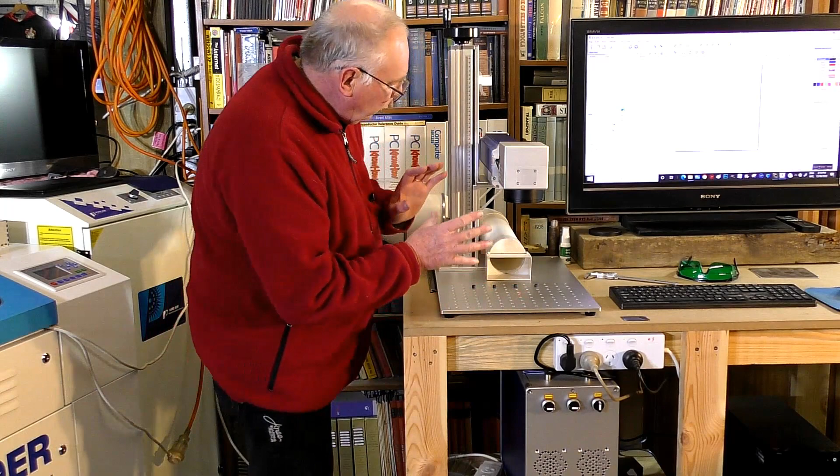So this is a fiber laser. The actual laser itself is housed in this box that's slightly bigger than a computer cabinet, and this is the galvo head and adjustment mechanism. Inside here there's two mirrors that move extremely quickly, and this is a lens that directs the beam down onto the work. Now this particular laser is a 30 watt fiber laser, but don't let that fool you.

That 30 watts is magnified up to about 24 kilowatts. That's how it can, if you want, cut through stainless steel.

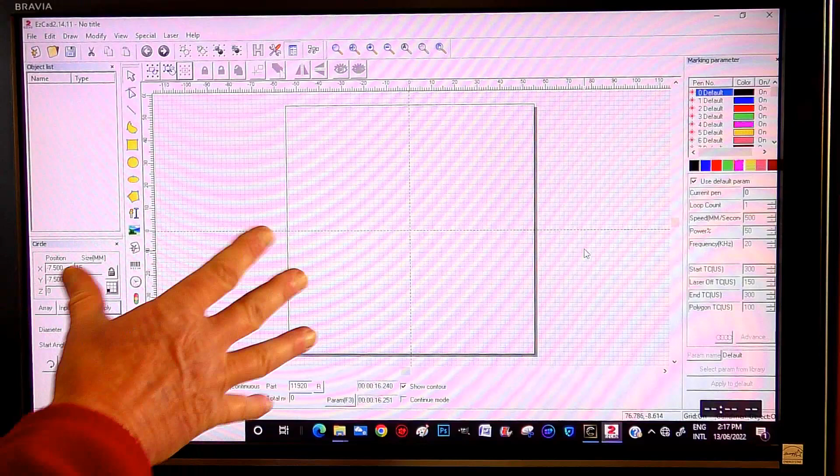Now, I'm going to give you a short demonstration of the power of a small but pretty powerful fiber laser. Okay, so this is the program that runs a fiber laser.

Now this is called EzCad2. It's fairly simple to use, however it does have its own peculiarities being a fiber laser, and I'll just demonstrate some of those now.

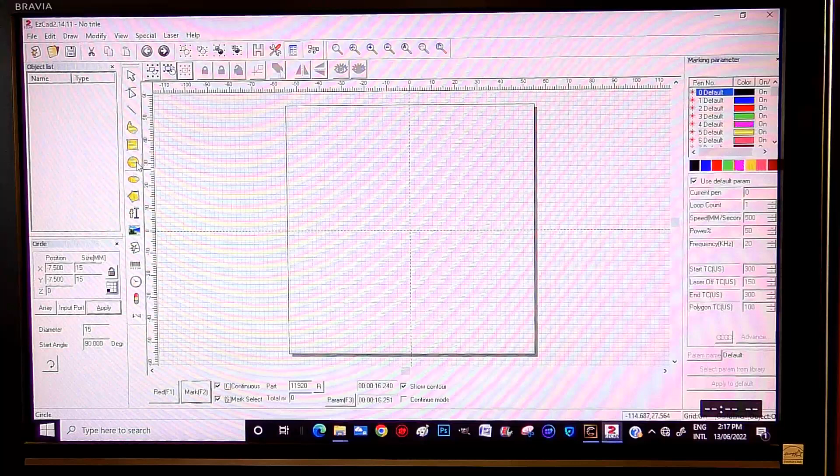So we're going to come over here and we're going to pick a circle, and we're just going to draw it in here. I'm going to come over to this side and we're going to assign a diameter of 15 millimeters and press enter. Now you can see it jumps to 15 millimeters.

Now the lens that I have in at the moment is a 110 by 110 millimeter focal lens. So this square area here is 110 millimeters square, as you can tell by the rulers.

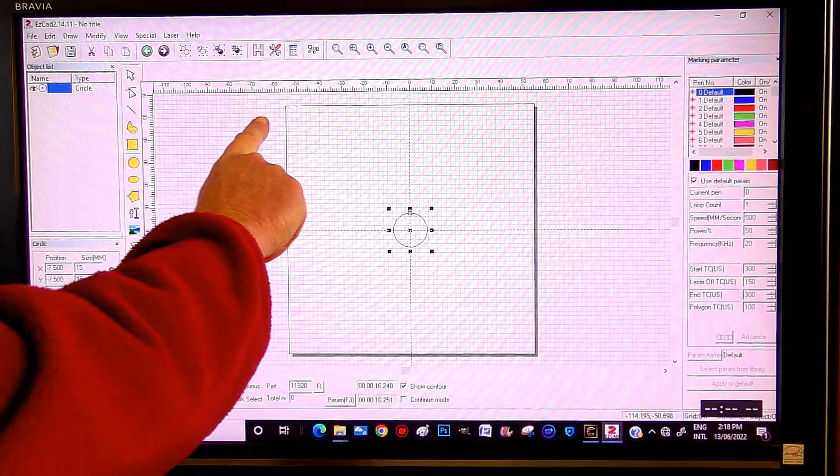Okay, now I am just drawing this circle because I'm going to drill a hole in a piece of shim stainless steel.

Now, to do that, we've drawn our circle. We need to come over to this side. It's on a black layer. Same as any other laser program, you work with layers. So we're on the first layer.

So now we're going to assign an output for the fiber laser. We don't want to use the default, so uncheck that. This doesn't really matter to us, that's sort of saying just do one cycle. But I can change it down here to continuous if I wish, and we do wish.

Speed, we're going to say 1000 millimeters per second, so it can move pretty fast. This particular one can go up to 5000 millimeters per second.

Let me see, power. Well, as we're going to be drilling a hole, we're going to say 95%. Now, this is the one that a lot of people get confused with.

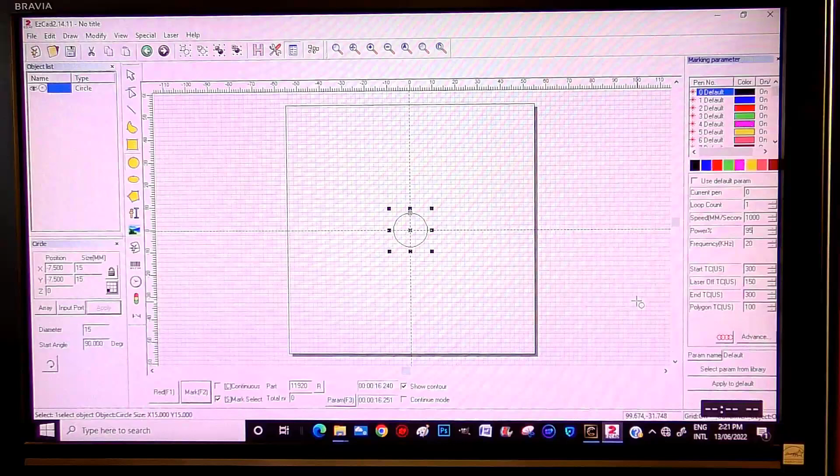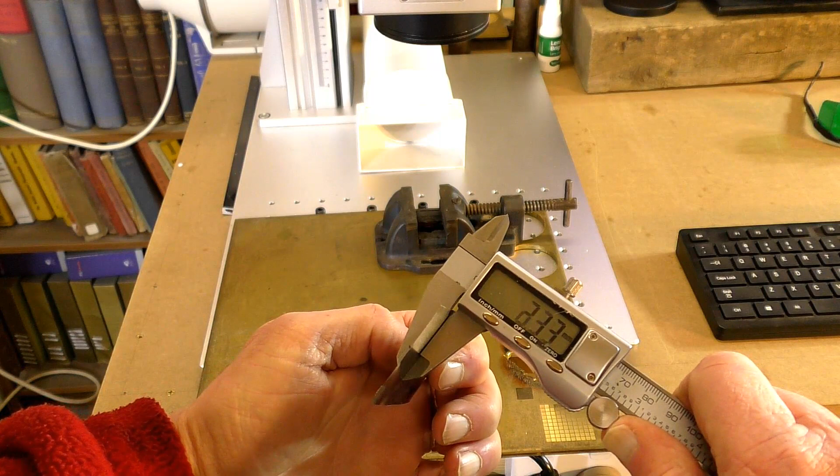So now I'm going to set a piece of material up and we will cut through it. Okay, so I've got a piece of stainless steel here. I'm just going to measure it for you. So it's 0.09 millimeters, that's 3.5 thou.

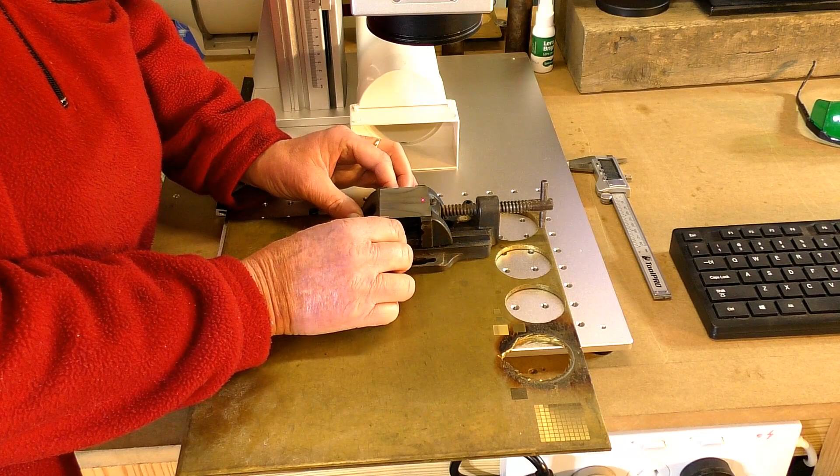Right, so we're going to set it on here like this, because I want an air gap underneath, and it's very important to get the measurement right underneath the lens.

Now, with this particular lens, it's necessary to be exactly 167 millimeters above the surface of that material. It is crucial you have about half a millimeter.

You have half a millimeter play. That's all you have between it doing the job and not doing it at all. It's very crucial to get the correct measurement. I've got the red dot laser on now showing me where it's all going to happen, right there. Now I'm going to bring the camera in the front and underneath slightly, and you'll be able to see it go through pretty damn quickly.

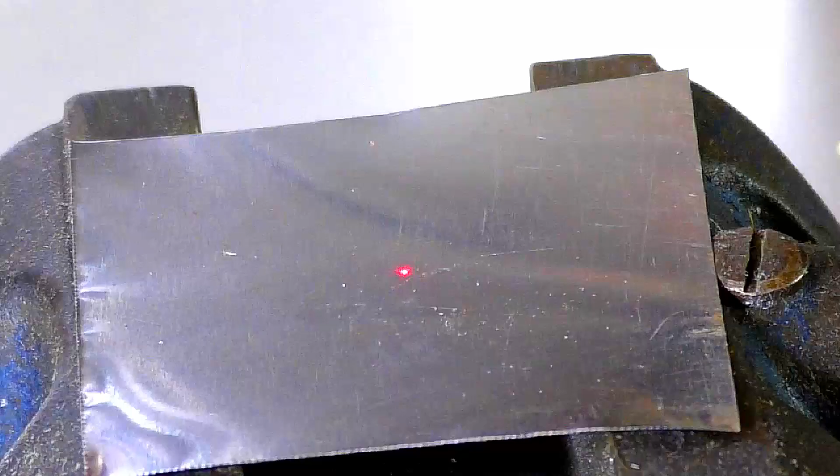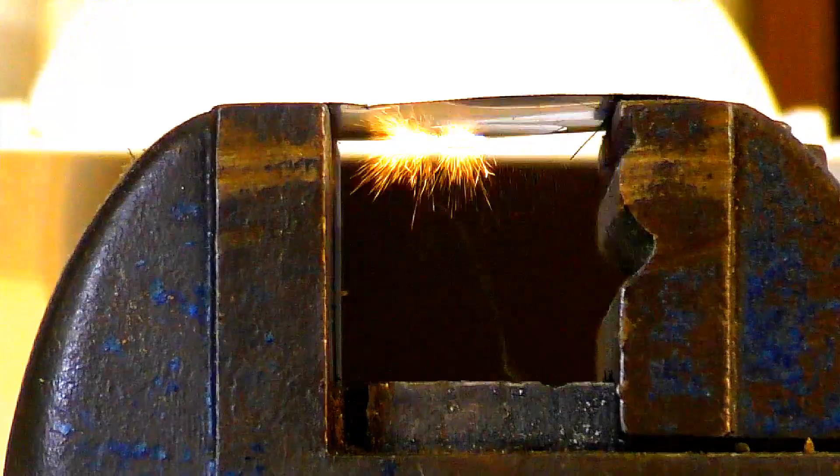So, if I can hold these. So that was a very quick demonstration of a fiber laser punching a hole through some shim stock stainless steel. So I think you can grasp the amount of energy that a fiber laser can actually punch into a small area.

And the way in which the galvo head, that's what this is called, the galvo head mirrors can actually focus that laser beam and draw a circle and just punch a hole straight through. A matter of seconds to go through that.

But you don't normally buy a fibre laser to do party tricks like this. What this fibre laser is primarily used for is marking. When I say marking, I mean putting a barcode into something, or for our next demonstration we have a high-speed steel or tool steel drill here of 13 millimeters, and we're going to engrave into tool steel. This is going up quite a few notches from thin shim stock stainless steel. This is a lot harder to get into, but fibre laser, not a problem.

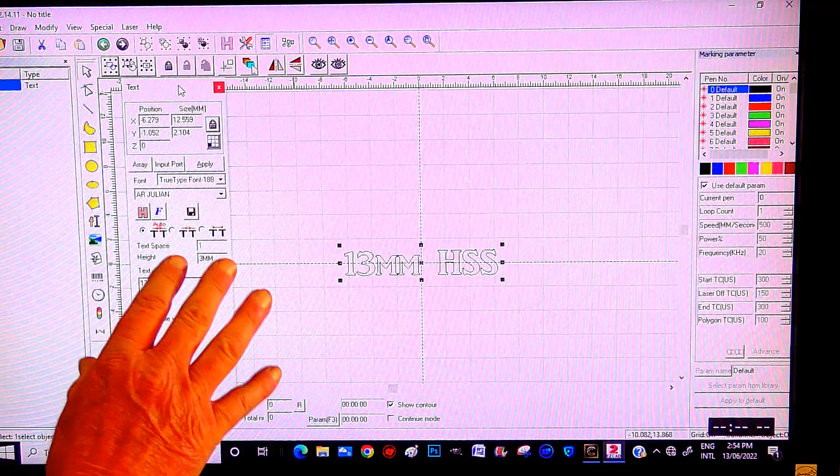So I've gone into EzCad and I've pulled up the text menu and I've just written 13mm HSS, which is the type of tool steel that it is.

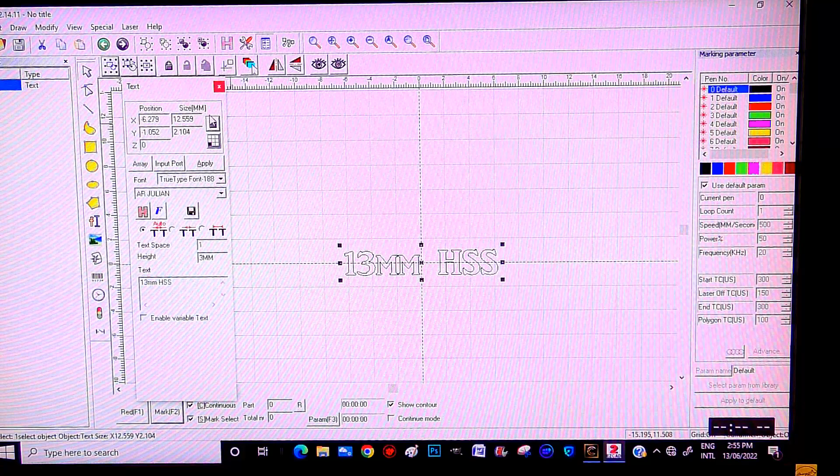So we're done with the size of this. Now let's highlight that again. The size of this is 3mm high, and it is just over 12.5mm in length. So it's quite small. So we're just going to put that down here, out the way.

Now we're going to come to the hatch. Now, a lot of people have problems with hatches. A hatch is just the letters. The letters I am going to fill in with scan lines. So it's called hatching. That's all you're doing, is putting scan lines in.

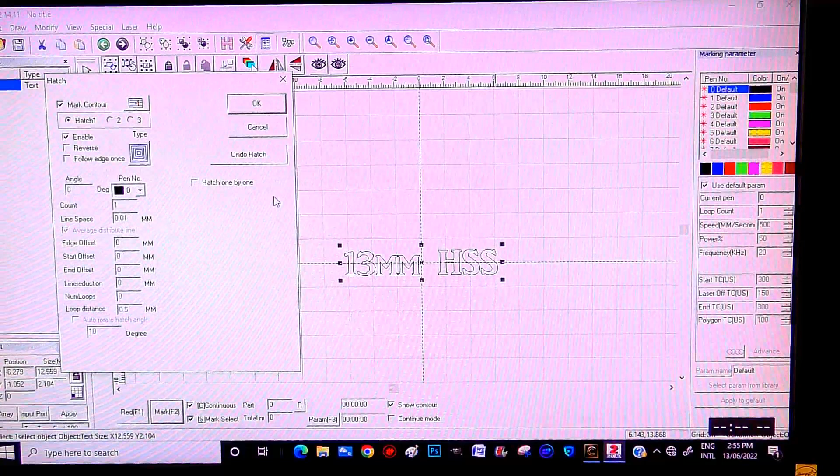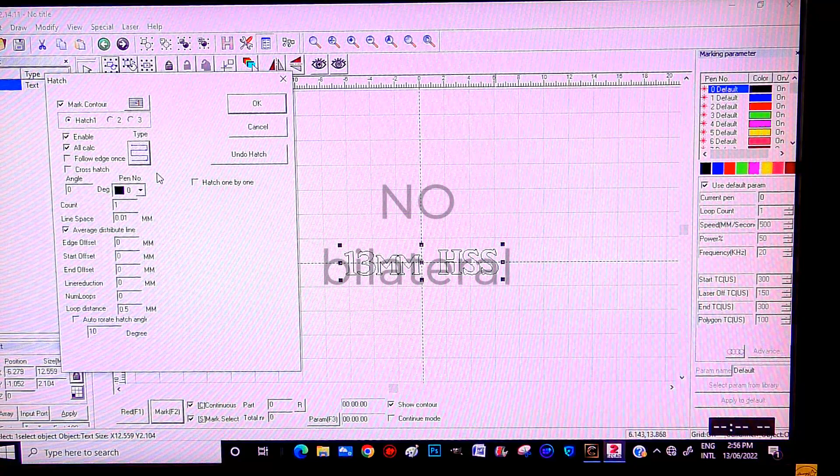The particular method of scan lines can vary. This is a radial, in other words, it'll start on the outside of the lettering and work its way in. Probably we may use that. This is called bilateral, in other words, it will scan left to right, come down to the next line, then scan right to left. So that's bilateral. Well, that's unilateral, but sort of dot dash.

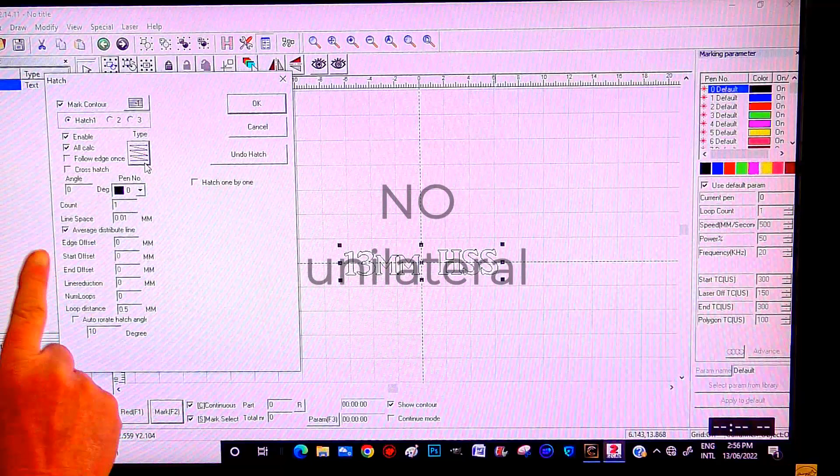Now this is what's known as unilateral. So it scans in one direction only. So it scans that way, switch off, come here, scan again, and scan again, and scan again. This particular job we're going to use, I think, we're going to use a bilateral.

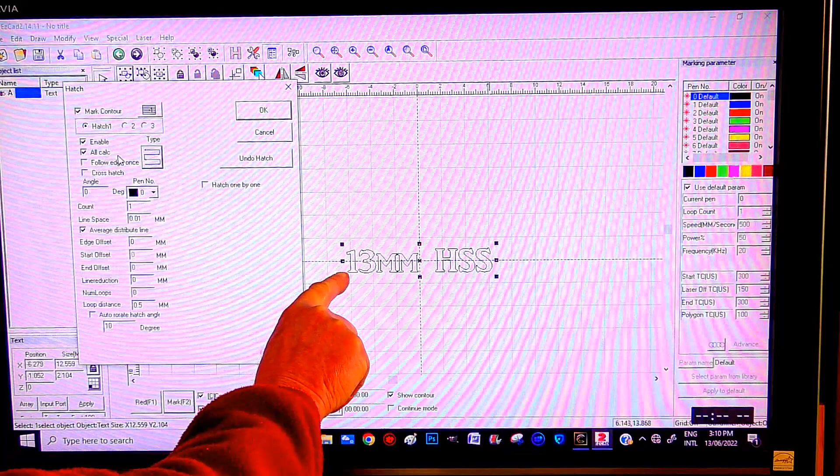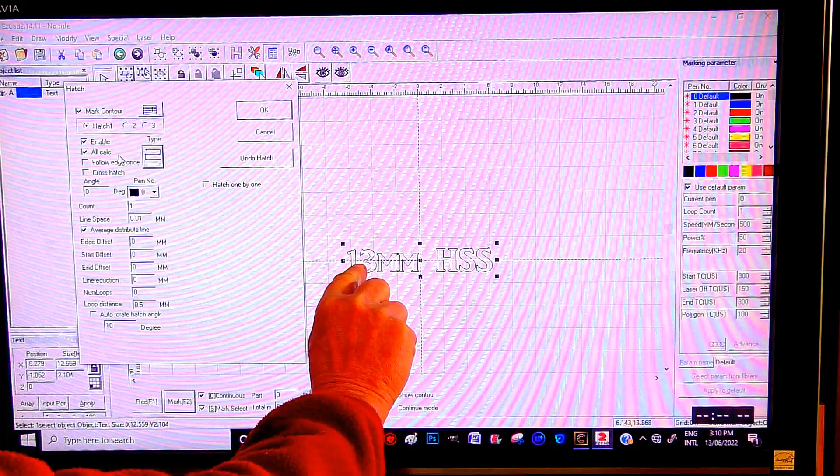Pen, black layer pen, all calc. Now what that means is the laser's going to switch on here, fire as it runs through the letter, and switch off, and then fire again in the middle of this letter, or in this letter. If you don't tell it all calc, it will fire through here, and it could come up here slightly. It won't be in a parallel path. So this just makes sure that it is in a parallel path.

Now this is the step over of the scan line, which is 0.01 of a millimeter. I think we're going to narrow that down a little bit further. We're going to go 0.005. So quite tight, because it's tool steel. So you want to get quite a number of pulses into those letters to gouge the material out.

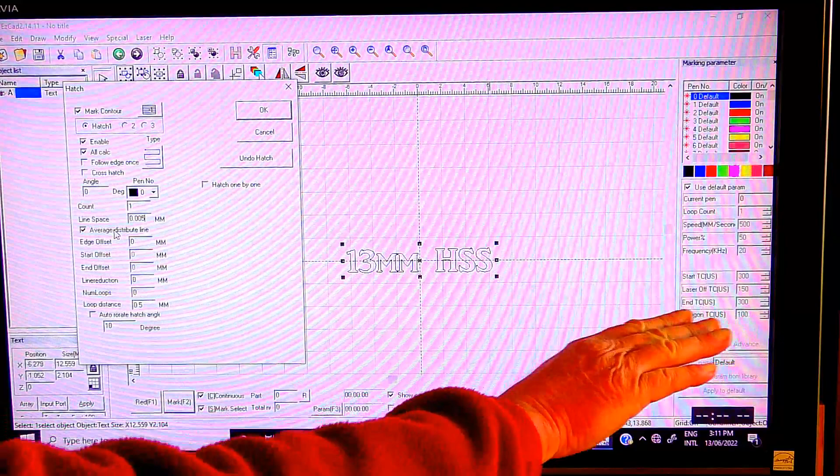Is this angle? I've got a choice of doing 3 separate hatches, which we will do. So for hatch 1, we're going to be in parallel, okay, straight across. Nothing else to fill in here. It's enabled, so it's actually going to carry it out. If you don't have this enabled ticked, it won't do anything. Okay, that's that one. And hatch 2.

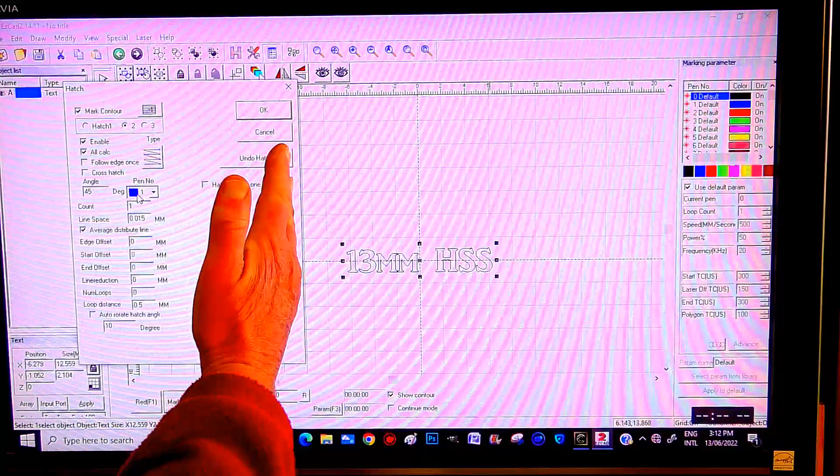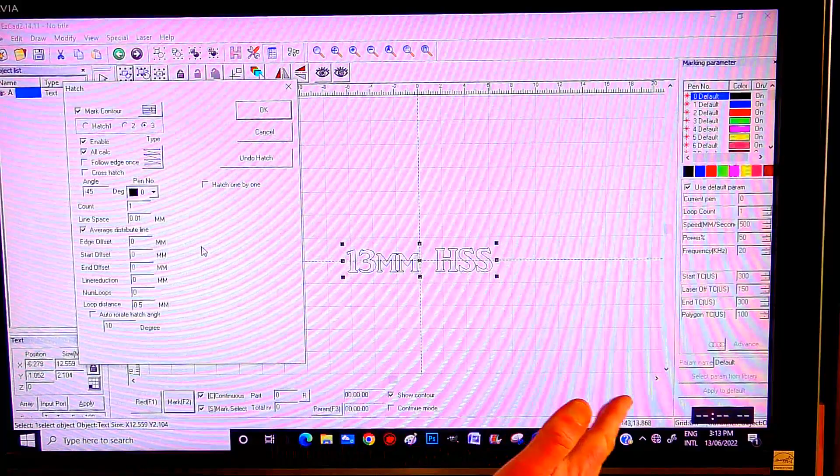Unilateral, I think we'll do a unilateral, yes. And we'll do that at a 45-degree angle out and come through, which is fine, but again we need to alter this setting to a 0. And then hatch 3, that's also on a black layer. We don't want to alter the layers. This is minus 45, so we got one doing parallel, one coming in at an angle of 45 degrees that way, and we'll have this one coming in at an angle of 45 degrees that way. That way it eliminates any scan lines, or it ensures you get good coverage, and it'll do it in a matter of seconds, so it's not time wasting as such.

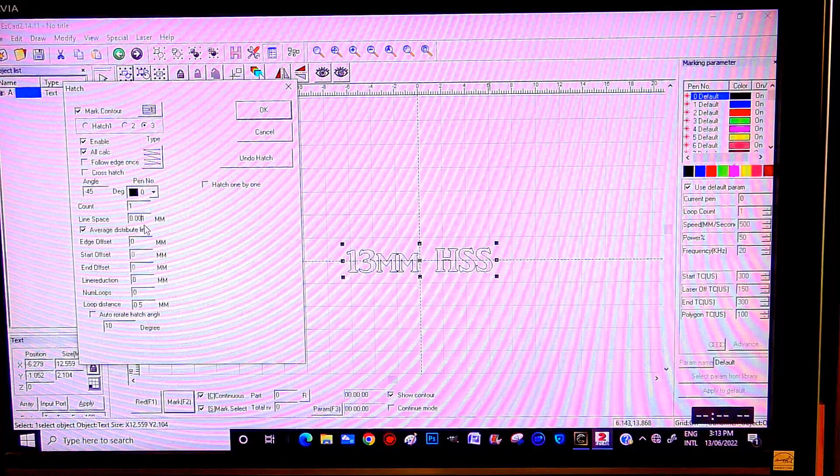But again, we need to put a 0 in there. But I've got all at the same scan line distance. And we're going to OK that. So notice now it's all gone black. It's coloured it in, so it's accepted that, OK, it's a hatch.

So now we come over here, it's the black layer, and we're going to turn the default off. I'm going to do 100 millimeters per second scan line, and we're going to go again 90% power for this, 90% power, and 20,000 hertz is fine. We're going to be putting this into tool steel, which is really, really tough. The only tougher material than this is carbide, and one day we'll give that a shot as well. So I'm happy with all that.

So now let's set up the drill underneath the laser head.

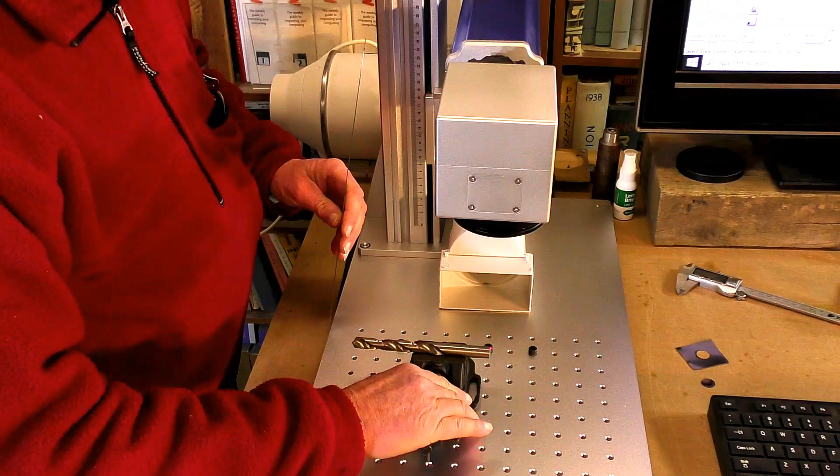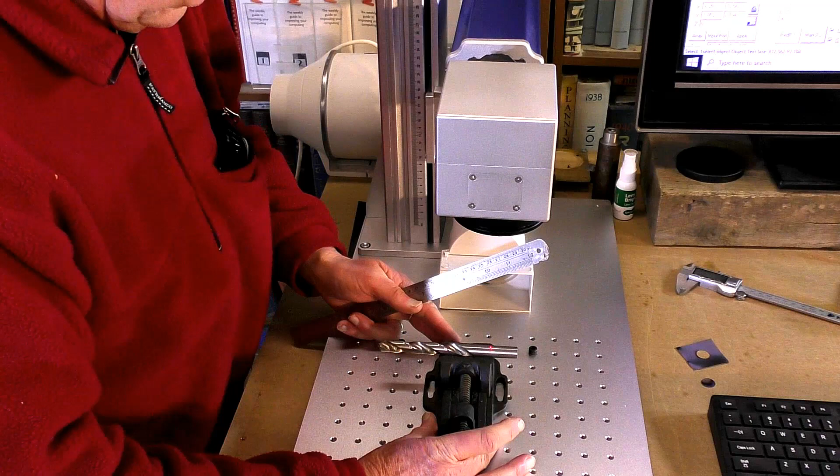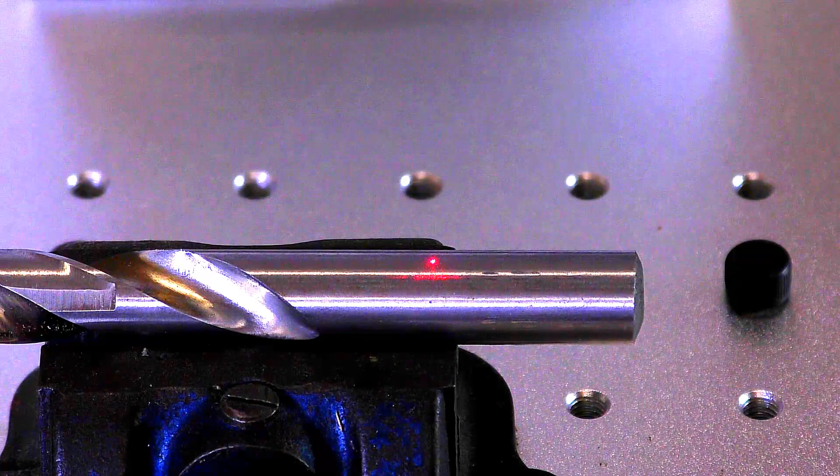Okay, now again, it's crucial to set the lens up exactly. In the case of this lens, which is a 110 by 110 focal, it needs to be exactly 167. That's it. Okay, so I'm just going to highlight that now, and I can move that to get it just right. It's right there. Okay, let's see if I can get it better. Can't get it any better than that, I'm sorry.

Okay, here we go. We're marking.

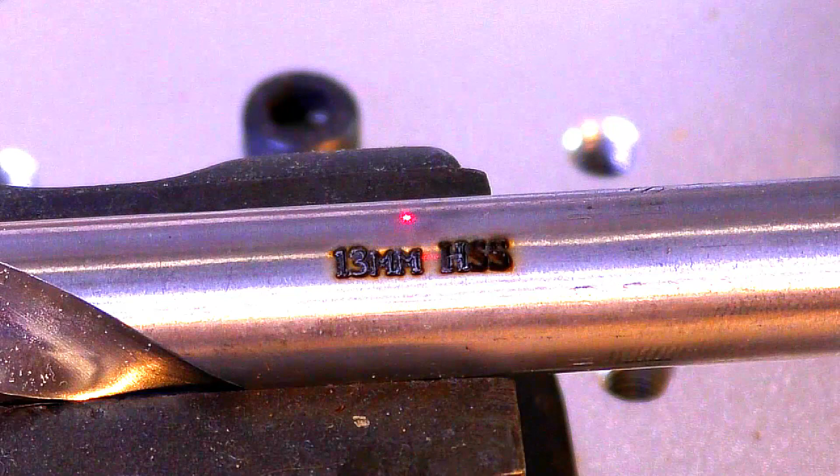And that is the end result. Now that is really deep into tool steel. Now I'll just clean that up a little bit with a wire brush, and you'll be able to have a better look. Okay, I think you can pick that up.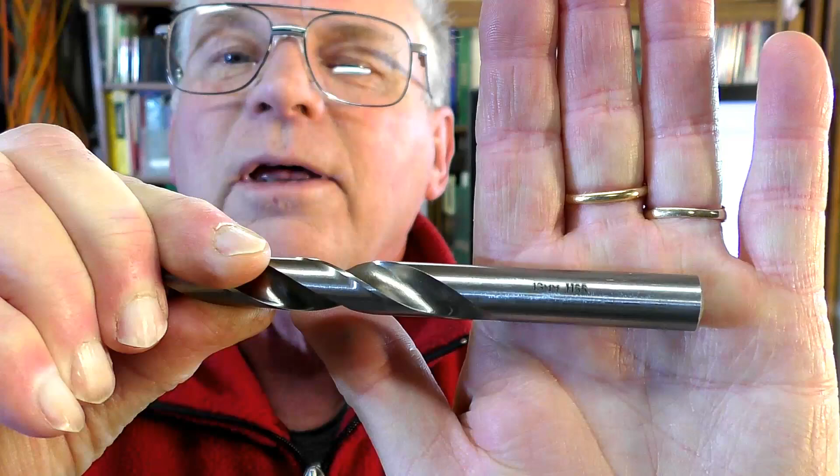13mm HSS, and that is really, really deep. I don't know whether the camera can actually pick that out, how deep that is, because it's so shiny and goes really deep. Okay, so I don't know whether the camera can pick that up and really do it justice, but it is really deep, and I actually don't have anything to get in there to measure how deep that is, but at a guess I would say it's between 0.2 and 0.3 of a millimeter deep, those letters.

Now I purposely ran the laser, or set the laser's settings, so it would run for a considerable amount of time to get a deep etching in tool steel. And of course, in reality, the fiber laser would etch that sufficiently to be a permanent mark in about 5 seconds. So this was just a demonstration of really etching into tool steel.

And I hear you ask, oh well, what's the good of that? We don't need to mark drills or anything like that. Well, this is really just a demonstration to show you, well, it will mark tool steel or any other type of metal you put under it.